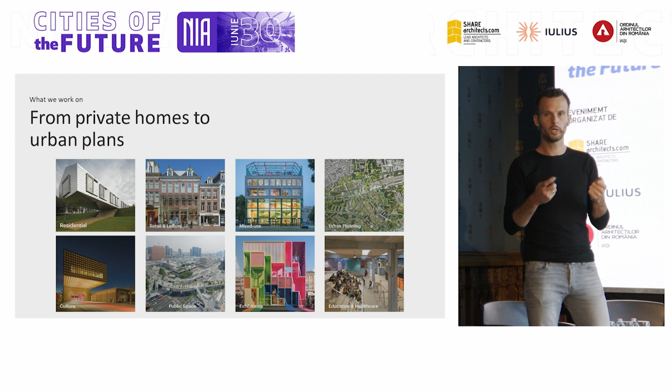What is the Iași of the future? There needs to be a roadmap introduced so that everyone can communicate about it and participate in it, as we are doing here today, to try and find that way forward that we can all agree on.

So these are the type of things we try to do. We design green, innovative, and social places, like this market hall in Tainan, which seems to be a landscape, but underneath are the stalls that sell the foods we will grow on top of the building. These are the kind of density studies we do, trying to mix functions and compactize them in order to make our buildings more energy efficient, make our building processes more efficient, and make better use of the available space in our cities, which is becoming more and more limited.

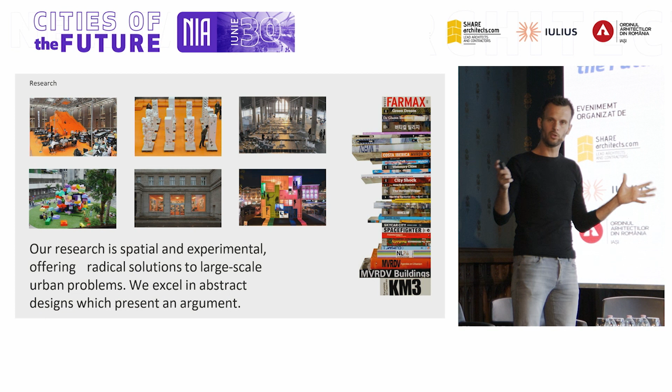And we research to do that. We investigate with universities how we can make human towers that are open and porous, that can sprout plants and allow oxygen in, instead of the basic extrusions popping up in many parts of the world nowadays. We want to see what it would look like if everybody designed their own apartment and we stacked them on top of each other into a tower.

What a great tower that would be. And by being that radical and that almost provocative, we want to try and inspire people to think anew about these things that we have been thinking about for years and for decades, and sometimes we are unable to think differently about and to be a little bit more innovative about.

One example of the buildings that we do here is the Markthal in Rotterdam, where we used apartments to make a fresh market hall in the middle, and we painted a great mural on the inside of that hall with windows of people looking down onto the hall, actually being able to put a little fishing rod down and get a banana from the market stand and hoist it back up again. So this interaction of people and place and activities is one of our essential elements.

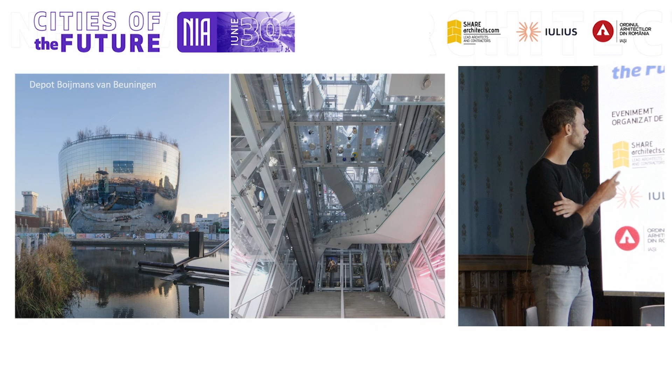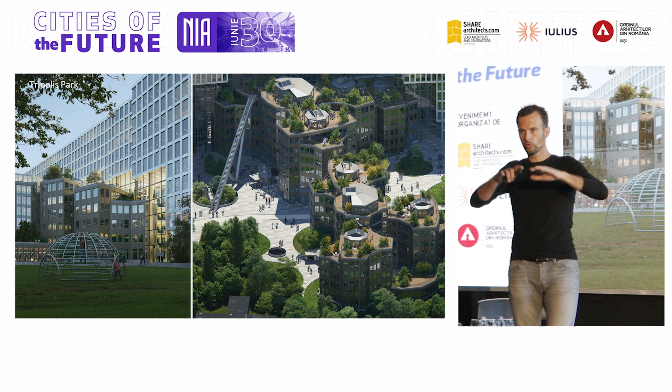So we created a landscraper that is almost hovering over it, taking a very respectable distance from it, creating a tension between the two buildings, where you can see that old and new are actually meeting together. You see at the upper image a place where you can walk through, where you have bridges between the two buildings, connecting the past and the present.

And I'll finalize with the building that is just recently completed, that Gideon and I have worked on for the last 7 years, which is Valley in Amsterdam.

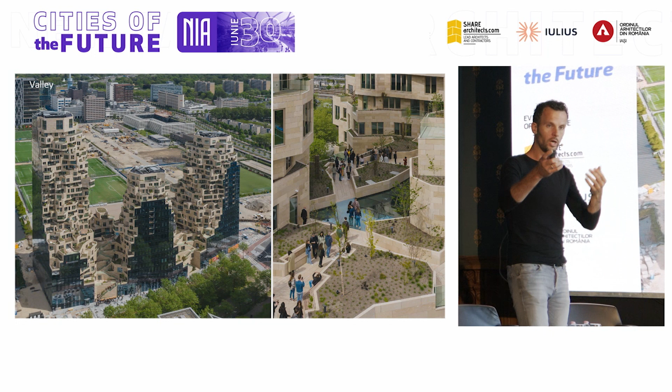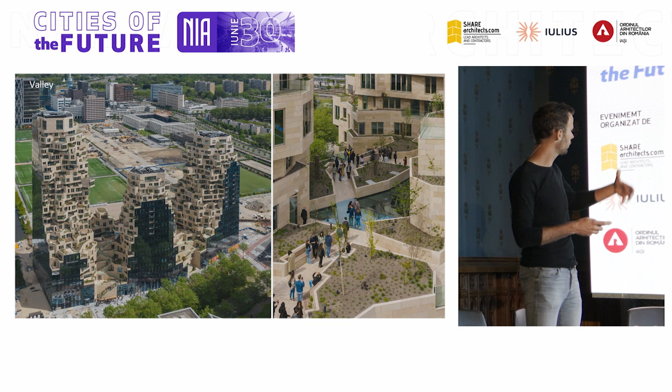And this is more or less our example of how we can make these towers more open and more porous, as we just described, by having this almost mirror-ish block that we have carved out, that we've made accessible. Everybody can just walk up here, take the stairs, and go visit the park that is in the middle of this collection of towers, because it should be open and accessible for everybody. If you make such a building as this, it is for everybody and not just for the people that actually live there. You need to come together in such a space.

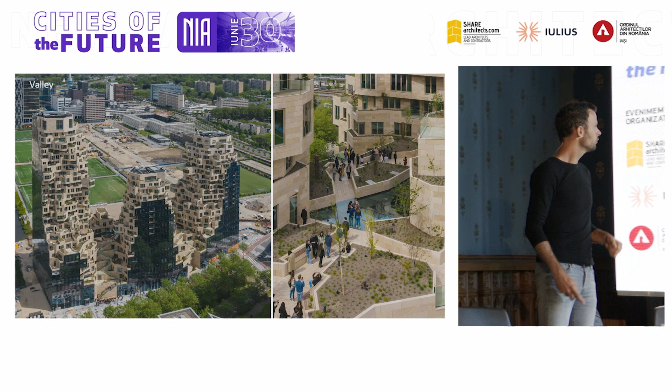Just finally, as we did in Seoul, where we transformed a highway into a horizontal park for everybody to enjoy and to reconnect parts of the city. So that is what we do, that's what we work on, the types of projects that we do.

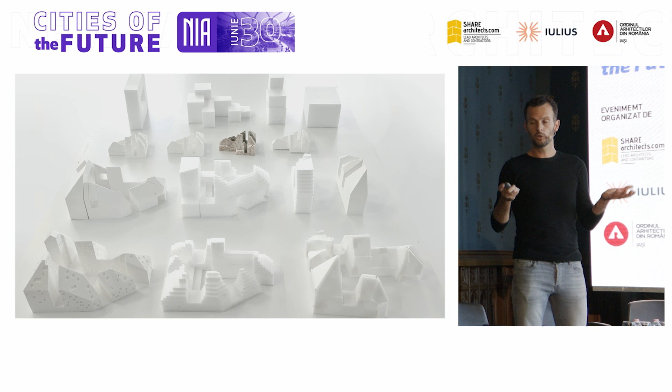So I go to Hills of Iași now, our proposal for the site here, and I'll show you a couple of the studies we have been trying to work on, some of the iterations of the ideas we have. You can see almost instantly that there was a general direction right from the very start that we wanted to investigate and develop further, and that was to find something contemporary on the one hand, but that takes its cues from the surrounding and from the history in the surrounding, because that is actually what the site is all about. There's two sides to it: a higher part, a lower part, an old part, a contemporary part that's necessary. There are dichotomies to solve, right? There's a contrast to be bridged here, and that is, I think, the main challenge for this site.

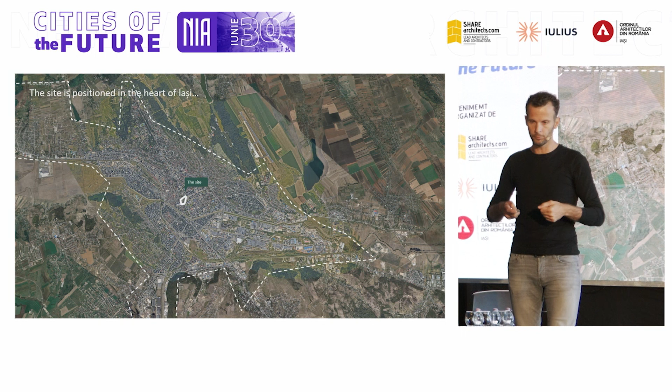So we go to the location, we zoom in on Iași. We have never built a project in Romania before, so it was a great honor for us to be able to put our focus on it, to find the natural beauties of the surroundings here in Iași, and to become aware of the cultural, almost massive cultural kind of load and layering that is happening in Iași, and all the things that have happened here before and how they are still affecting the current development of the city, but specifically also this particular site.

So we look at the site in a little bit more detail, as we have already heard about before, so I'll keep it brief. But yes, of course, indeed, the palace takes central stage here, and it's the part that should be respected and should somehow form the start of this plan. But also the Biserica, where we have been looking at to see how that would fit into it. Also the monastery, with its intricate details on the outside that fascinated us maximally. Great to see what is happening there on the facade and the detail that was bestowed upon it.

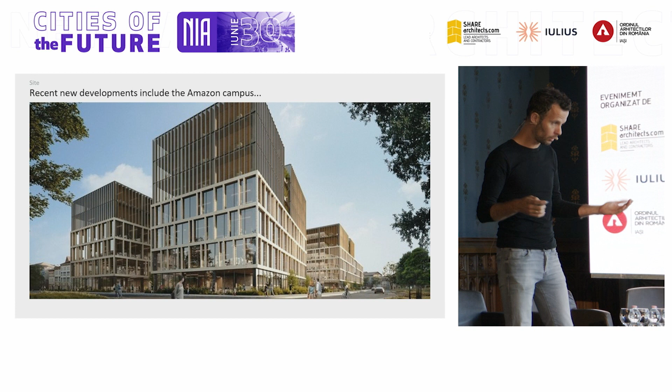But also the Cathedral a little bit further down. We started to feel the weight and the pressure, almost in a positive way, of what has happened here before and what is happening here now. This is also where this duality comes in. New developments are being brought to the center—the Palas Mall is one of them, and the boulevard has been improved recently. So these things are coming together. Iași is ready to take a next step, a new layer to the layers of history already there, and this building could become the representation of that.

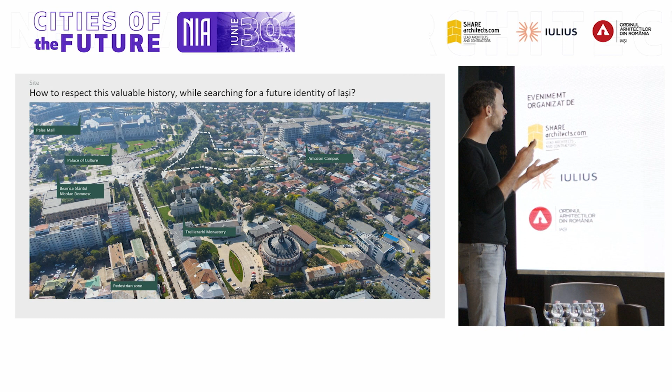And you see here on the side the difficulties: the smaller grain with the Amazon campus on one side, and the palace with its more monumental elements on the other side. So how to deal with that, how to see and form an opinion about all these different, almost conflicting interests.

So we started very briefly on the brief. Lots of housing to be done, smaller apartments as well, which is an important part that would drive the design. A large public area on the ground floor for all to enjoy, and parking partly above ground and partly below, trying to get as much as possible below ground to open up the ground floor.

We extracted these quotes from the brief to see every time if we are actually taking these cues in the way we design it: Are we respectful and honoring the past? Are we making a lively and public place here? Are we leaving a mark for the future without forgetting to give answer to the past?

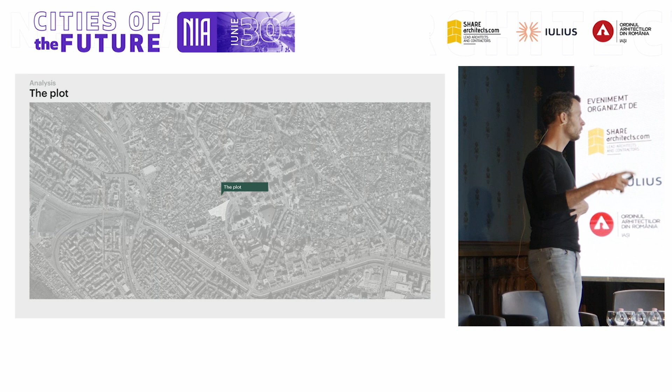These things led to our analysis, first from the site and from the overview, urban point of view. So we have the plot, and we have all these historic players in the vicinity that we need to respond to. Then there are the two axes we need to respond to.

How can the Anastasi axis be given a focal point at the very end? Right now the square is leaking away almost, and something is needed to capture it, but not to end it—because ending it would prevent it from becoming an axis that might continue all the way to the river, where future developments are slated to happen. So it needs to be a building that is recognizable, but porous at the same end.

On the other side, towards the Stefan, it needs to be one of the buildings taking part in this promenade of buildings we have there, with these historical buildings. And what else—the Strada Palat, a barrier you could say, something that needs to be bridged. A problem, I think, that we need to solve to make this a much more accessible area.

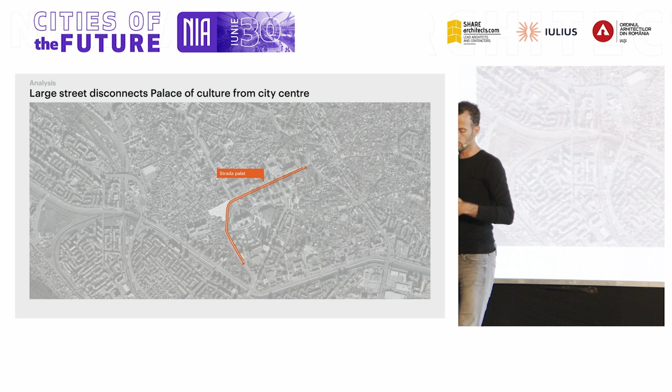How can we reduce this? Possibly by doing one-directional traffic—that could be a start. We can greenify the lane that is opened up, and maybe in further times we can make sure the whole connection to the palace can be made green and pedestrianized, because there is a need for additional green.

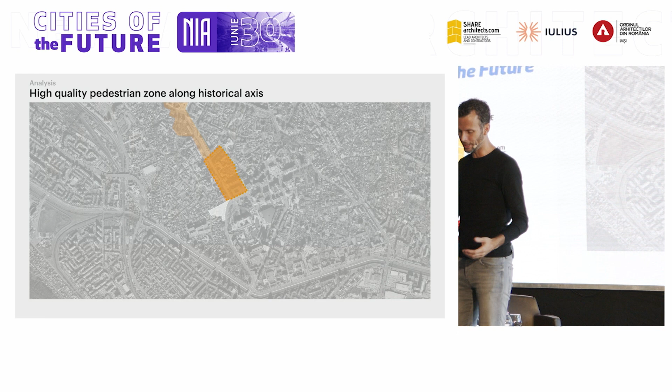There's quite little, actually, in the vicinity that we need to improve upon. Pedestrianizing stops right in front of the palace, and then there's the big car park we see right in front with all the asphalt. There's a big potential there to extend this further. And finally, of course, the height difference—the 12, 13 meters of drop that separates the two neighborhoods—that this building needs to somehow bridge.

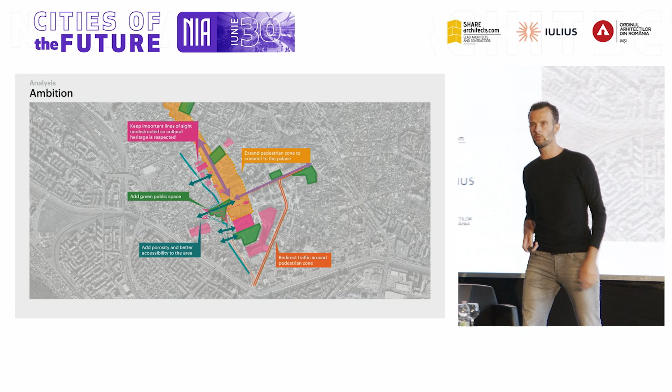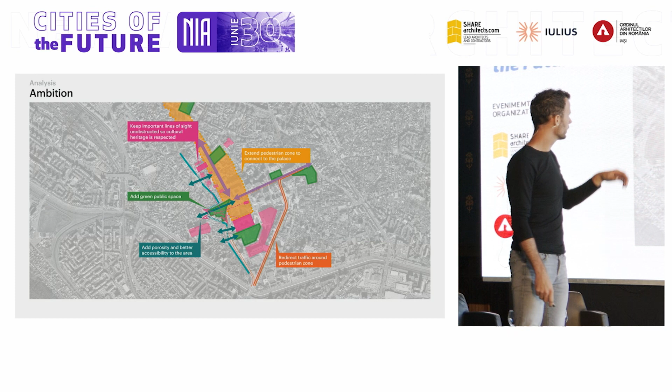We put this all together into this map of analysis, and then we add these elements and ideas to try and solve it. So yes, that porosity to make this an accessible building, a green space, view lines to make sure all the axes pointing towards these historical buildings are integrated into the building, but also readable—so you can recognize where the framing of these buildings takes place by carving away mass of our project. And finally, to extend the pedestrian zone by maybe redirecting the road, as I just explained.

So I boil this down to our ambitions, to a kind of overview, presented in a friendly, happy, and optimistic way. We want to connect, we want to stay respectful to the surroundings, and we want to be exciting at the same time.

Open up the ground floor, open up the doors of the shops and the offices and the gyms and the beer brewers and the people that host lectures for the vicinity and for the community around it.

We want to be future-proof and sustainable, obviously. We have an obligation to the planet and to our future generations for that. And we need to be realistic and buildable. We need to make something that will not just end up as a pretty picture on the wall, but becomes a building for everybody to enjoy. So that's something that we need to take into account.

So I get to our proposal, to our design. The way that we always communicate these proposals is by a step story, almost like a little book that we do, step by step, to show how the data that we have collected becomes an integration into the design and becomes a literal representation of the design as well.

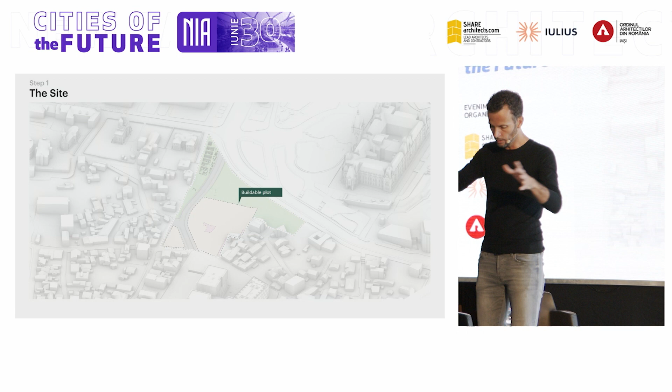So we start with the buildable plot. This is where we were allowed to build, the dotted line. The road was slated to be there. There is a spot in the middle where we're not allowed to build on, very clearly.

And what we did first, actually, is we started to go down. We started to see how far we could go down without going down too far and becoming too expensive, actually, because going down -2, -3 will make the project unfeasible.

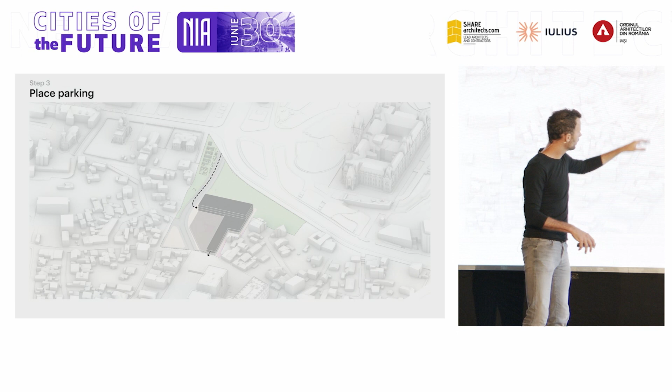And by going down, we were able to put one full layer of parking under -1. And from that point onward, we could stack up with a split-level parking towards the palace side, where the height difference is highest, and we could have the cars come in from the side.

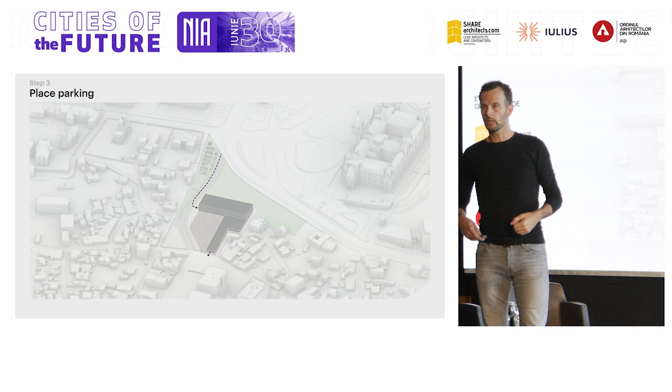And we actually chose to have the cars come out at the bottom, to see if we can prevent future car problems on the side. By having an entrance and an exit there at the same point, you could have a kind of traffic jam forming. So this way of going through it, to us, seemed the most optimal.

And so we continue, we cover it. We take the green that is already there from the boulevard, and we pull it over the plot, and we start to make it green.

And from that point on, we introduced the maximum program. So not a design here, but just a maximum envelope. What could we do? With a very specific mention here of the plot on the side that we wanted to keep empty, that meant a more compact building on the bigger plot. That meant more square meters on that plot.

But it also meant that we could integrate the idea of starting small and ending large, or large and small, whichever way you want to look at it, in such a way that there's something here that is low, that is about the community and about the neighborhood there, and that gives a place for the people that live there that is small, and it's almost like a welcome mat before the building actually commences and starts.

So the next step, we take our roofscapes, we start to carve them out, and we look at the vicinity. We see how the roofs of the palace are shaped, how everything is tapered in this vicinity. Everything that is visible on the skyline has like a fulcrum at the top, a momentum at the very top.

And we wanted to see if we could relate to that in this way, in a contemporary way, but in a way that everybody can read that this wants to be part of that existing cityscape.

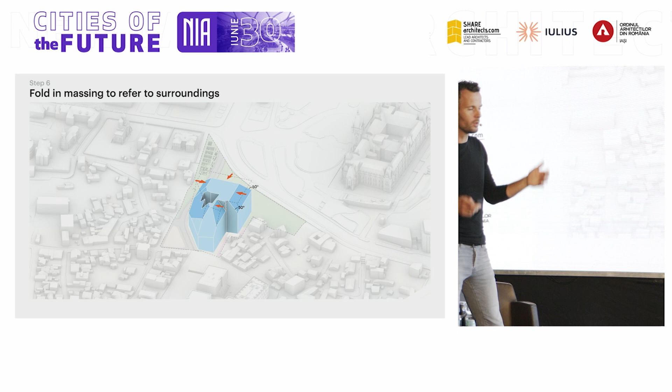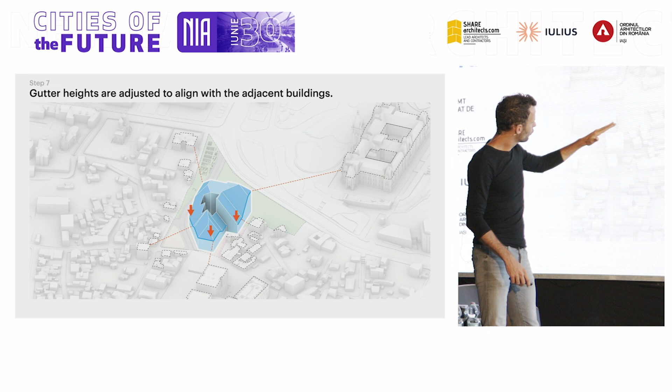And we developed that further. We started to look at the surrounding areas, gutter heights of the campus, where the split between the two blocks is. Can we relate to that? Can we bring the building down on each side to relate to opposing buildings and the heights that they have there, to form this landscape almost of gutter lines?

And then the next step, to carve it out from the inside, to make sure that the width of the building is not too deep. Apartments don't get too dark. We carve away a large chunk in the middle, and we started to make a courtyard in that sense. Still private in this case because it's not opened yet, but that will come, of course.

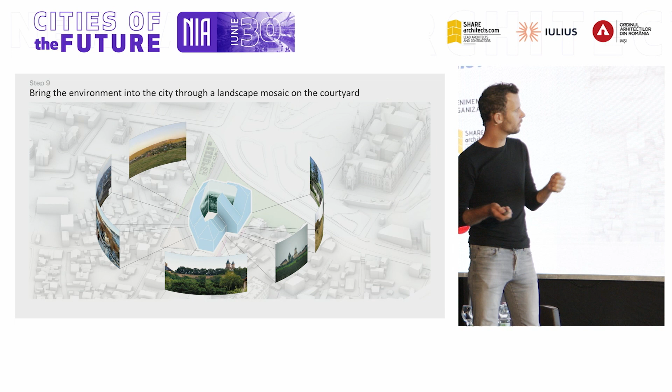And then the next step, we have this great space on the inside, and what can we do there? This is where we thought maybe our newfound knowledge of what is happening surrounding Iași, all these fantastic natural places that we have in the richness that is there, this treasure that is in the surrounding areas, can we bring it into the city? A literal translation of trying to get nature to become more prominent in the city. So we made a panorama.

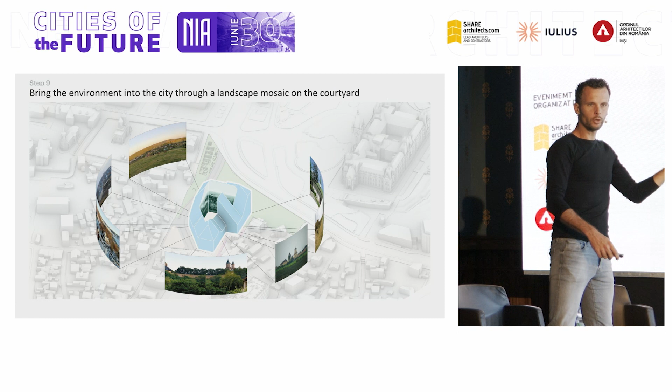We looked around at all the important places of the surroundings and put it on the inside. We painted a 360 painting of what you can experience in different directions if you were to go out to the countryside and see the natural richness of the Iași area. The same applied to the central courtyard floor, but I'll come to that in a moment.

And then we started to open it up. This is the main element of what we do. We open up the block, we make it porous, and we make it a block that can only be here, connected to the city.

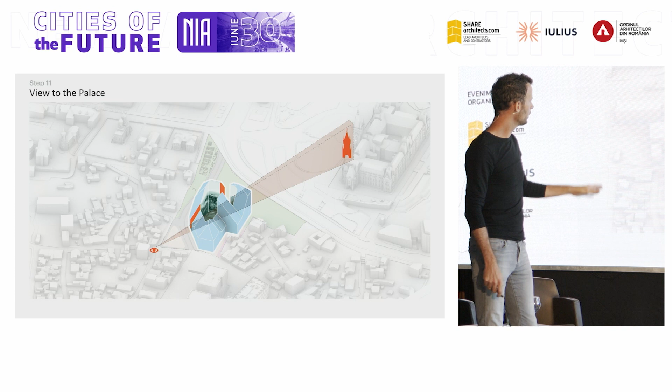So we make this view line to the palace to make sure that it is always framed and visible as a view line. We do a similar exercise towards the Basilica, getting an opening here and continuing the access all the way through, making the idea of being able to pass through it very recognizable and visible.

And finally, towards the cathedral from the ring, an opening as well to frame that view and make sure it stays visible always.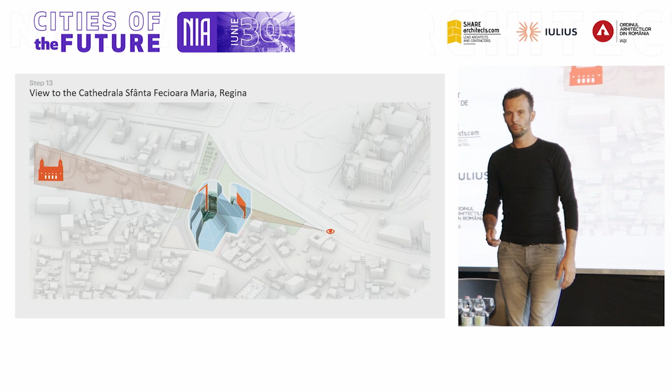Once that is done, we started to implement literal vegetation. Apart from the panorama we have, we wanted to make sure the inside would be like an oasis, a green, cool, cooling place where you can find all types of indigenous vegetation of the area, on the balconies of the people who live there, on the ground of the courtyard, and in the public spaces we make there.

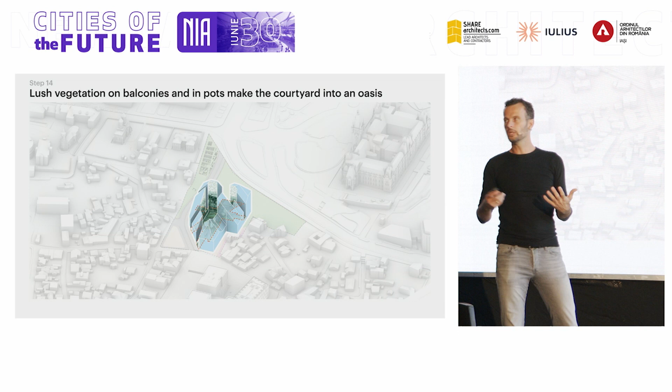So this will be the place where you enter this block and suddenly it opens up to you, becoming almost this palace of the people. This feeling of being surrounded by detail will be similar to what is done here - a richness and layering that this place and building deserves to have.

Finally, accessibility - important to make sure ramps are there, that people can get in, that disabled people are also able to get to all the plateaus and maneuver through this building.

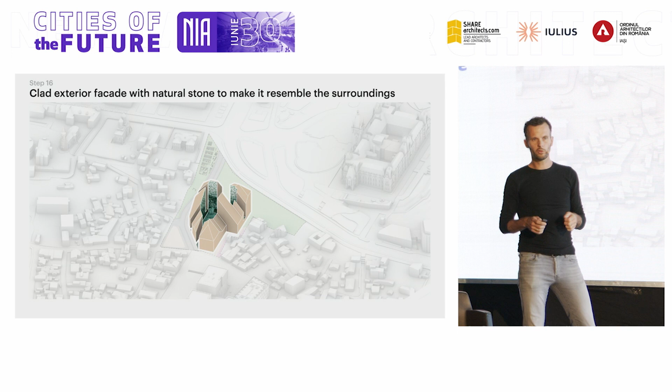Then on the outside, we started to take our cues from the surrounding buildings. We're trying to look at sandstones, natural stones, to see if we can almost mimic the shells of these fantastically decorated buildings we find here, and apply that to our block.

Finally, the parks that we made - I'll come back to this later. We have a great opportunity to make all these collective spaces and thematize them, to make sure they have a distinct activity and a certain reason to go there, whether that's the picnic park, the archaeological walk, or the beer garden you could make in the bottom park.

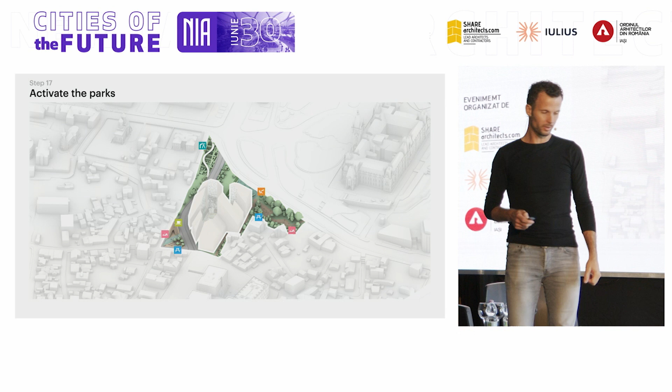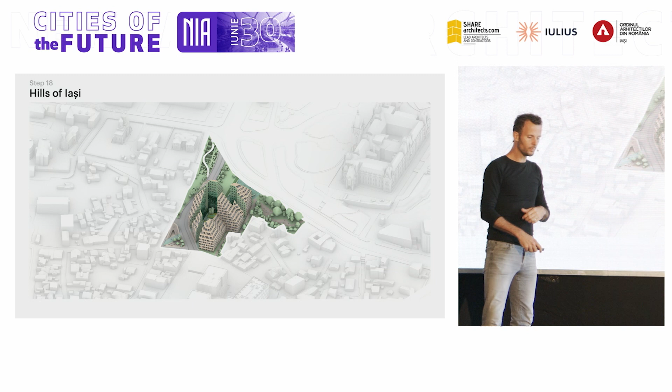And finally, our proposal, by making these grand openings to the houses, but not too grand, aligns sustainability with the amount of glass you should use to not heat up your building too much, by making pockets of loggias where trees can sprout later on. We get this opened up block - this great carved out rock with green on the inside that we want to show you.

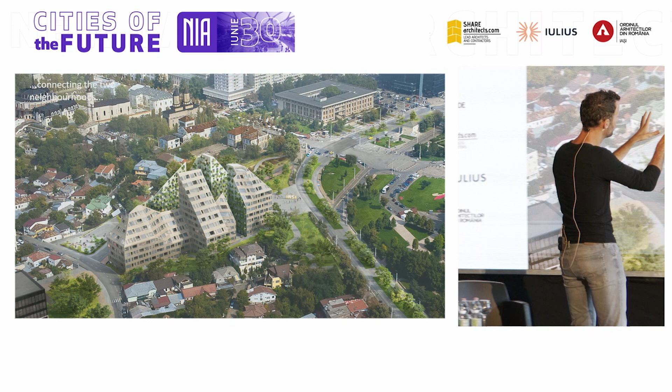So this is what it looks like in the end, implemented into the building and the surroundings, with the plaza here opened up, making a generous gift to the neighborhood, growing up, making a momentum and a move more to the palace side, being the larger volume on that side and allowing this porosity to happen.

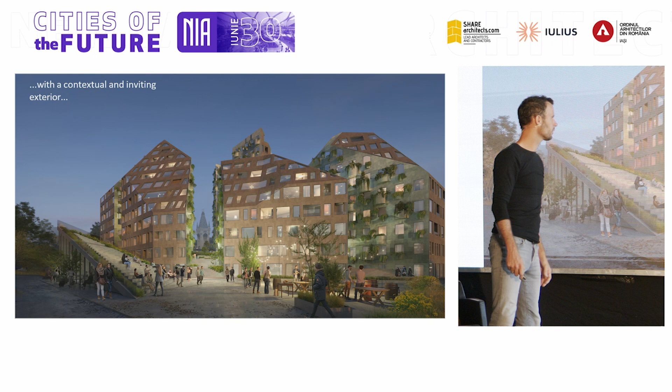And yes, this is how the views then start to present themselves, where you can walk through and see the palace in the background, coming closer and closer, going through this building until you reach the courtyard in the center, where you will see this mural, this great painting, where all the balconies of these people will represent themselves, where people will be able to interact when they stand on those balconies and enjoy this green oasis we make in the middle of this carved out place.

The montages, something we indeed needed to do, to kind of prove how this building would actually embed itself into the urban fabric.

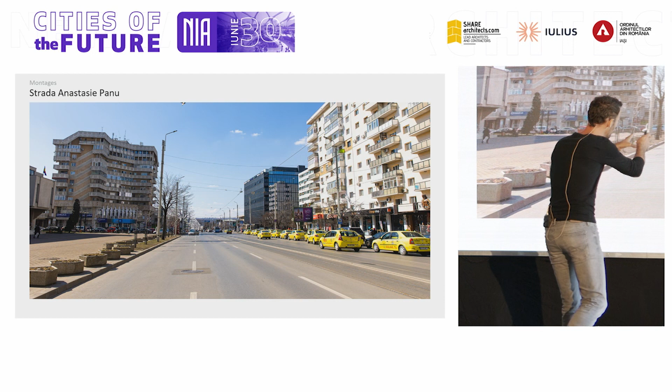When you come closer, you will see that it will actually allow you to pass through and to explore beyond it. Going further, looking from the side of the fantastic boulevard, you will see that it will actually hide itself almost behind it. It will not be visible, as the requirement was.

Same goes for this view from the boulevard, where it will be hidden in between the buildings behind it. And here it will represent itself, of course. Here it will form part of the tableau of this square that we have.

More reduced again here, trying to stay low, trying to not become too visible from this angle, and to be a little bit delicate in that sense, and maybe a little bit more refined, to only have one spire trying to interact with the elements of the cityscape that are already there.

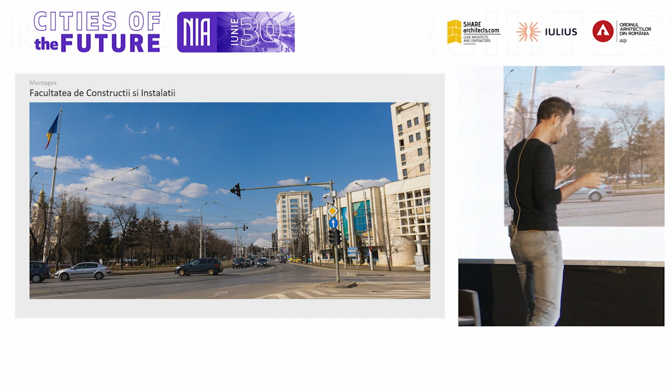And finally here at the end of the road, depicting itself, trying to see if this new form, this new kid on the block you could say, could maybe form an interesting point where you would want to drive towards and explore and investigate. Same here, where the street and the roofscapes are actually mimicked by our building, and we are adding to that roofscape with a silhouette of its own.

Final one from the boulevard, and I move to the public spaces. As I said, a little bit more detail about what we do and what we make. So there are many places that we add to it.

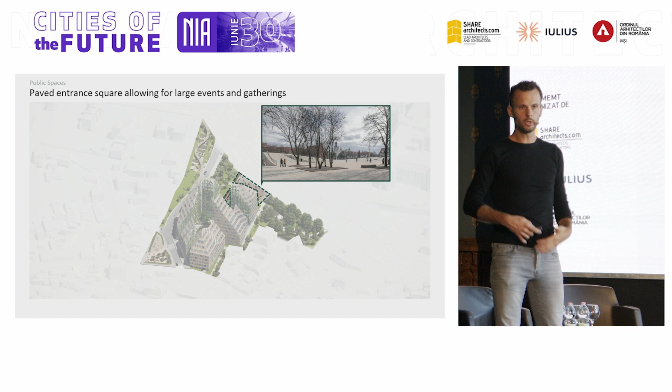We make a kind of drop-off point here, a welcoming square where you would be able to have the car pass by, drop off, drive away, and enter the building from a grand square where you can house activities, fairs maybe, markets maybe.

Then there's our picnic park, where we extend the current very high-quality space with a path and places to sit and to eat together with friends and family.

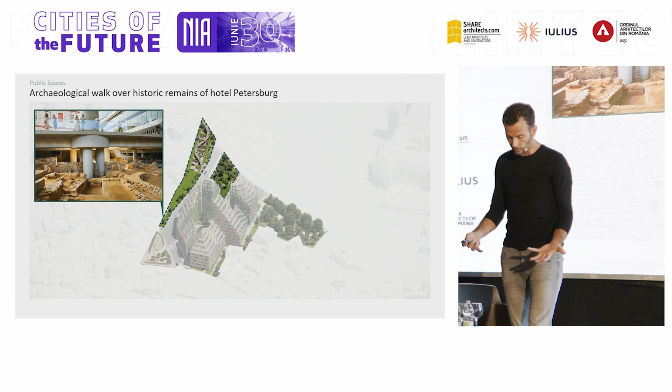Archaeological walk: we insert a road that goes over the findings that we have in this place, make sure that you are aware of them, that you can see them and appreciate them, and start to think about all these other layers of history that have been present on this site.

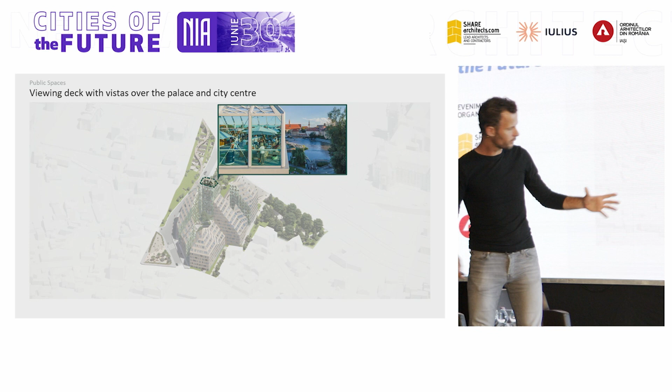We have a sky bar. We have places for penthouses on the peaks of this building, but the highest one we feel should be for the public, should be the place where you could go and have a coffee or an ice cream with your kids and look out over the city together.

We have the commercial spaces, all in the plinth, of course, opening up towards the inner side, where you can throw open the doors, where you can have your coffee and your beers, whatever the moment of the day is, and where we can activate this area on all sides of the building, fully surrounding that.

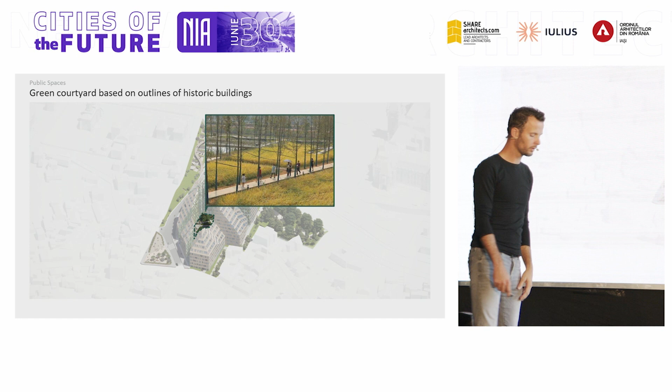And finally, on the inside, we have a courtyard that I will come back to in a moment, a place to stay, a place where you would actually want to linger once you're passing through the building, but decide to spend some time there.

And finally, the plaza, almost indeed a place where you could have that beer garden, where there's a small and kind of integrated pavilion underneath a lifted part of the square, where you can get your drinks, where you can sit upon as a tribune almost, to be able to talk and maybe perform as well.

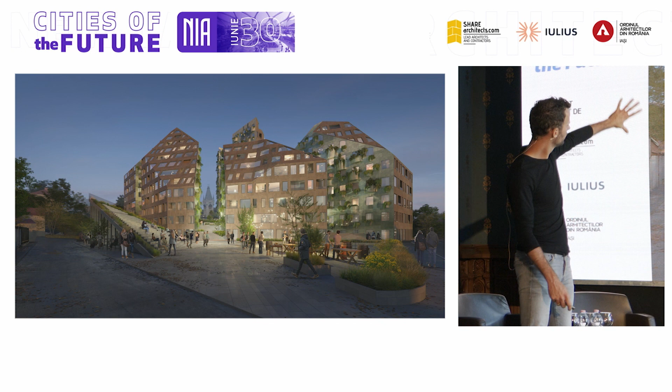And all of this supported by trees, to make sure that there's plenty of shadow, to make sure that there's places where you can sit when the sun is out, as it is in these days. So here you can see that place where you could sit.

So I move to the sustainable part of the design, and we have an obligation, as I said before, to integrate that into our plans. Our main goal with every project that we start is to keep the UN SDGs as a guideline for us, these 17 goals that aim to make a better planet together.

And we do these assessments, and we see where we see possibilities for every project to add to those and how to do that. So I'll give a couple of examples.

Right? So yes, indeed, we can try to give a greener and more biodiverse place. We can stimulate alternative modes of transport. We are very close to the center here already, so bikes will be the main form of transport. No cars — let's try to keep them away as much as possible.

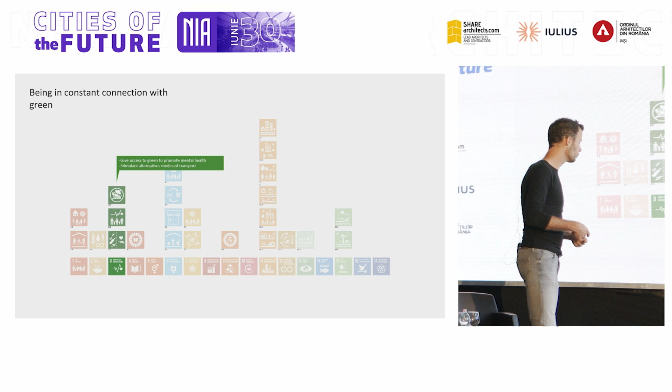Let's try indeed to make sure that we can modify our parking garage and make sure that it becomes something different in the future when these modes of transport move beyond the combustion engine. We can reuse water. We can use our planters to capture it.

We can use the porosity of the ground floor of the courtyard to make sure that this water is retained and reused, stored in a tank underneath the building, pumped up again to irrigate the planters that we would hang on our apartment facades.

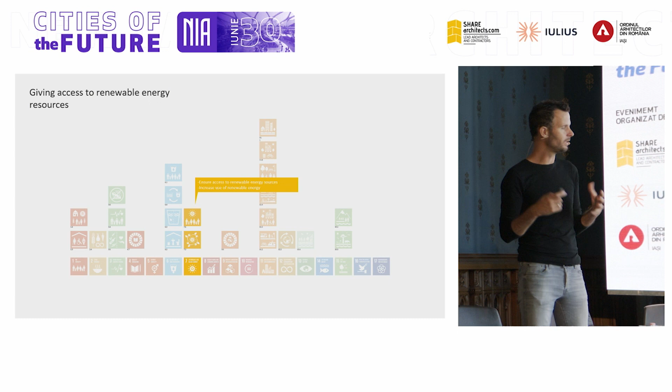We've got to make sure that we lose our addiction almost to energy consumption. We need to be more aware of what we are doing. We need to make sure that our facades are sustaining this, and that we generate energy by adding solar panels, in this case, to our roofscape. I'll come back to that in a moment.

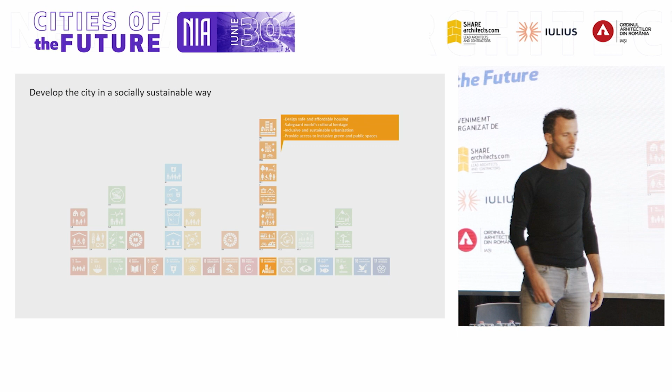And we need to make sure that we make apartments that are affordable for everything and for everybody. A mix is good, small units, medium units, and bigger units together, to make sure there is a certain mix that will allow this building to become much more than just an enclave for the few. Make it sustainable, make it, in an urbanization sense, integrated. Those things we've managed to fixate on.

And finally, the biodiversity of things, to have the plant life be indigenous, to make sure that the biodiversity is added on by these plants that we integrate, to make sure that the city indeed gets infused with nature in a very literal way. We started to analyze the BREEAM side of things.

Just a quick scan to see where we are. We already believe that BREEAM Excellent certificate is very much possible for this building, but we can go beyond if we start to look at materials and look at possibilities to actually also reduce carbon.

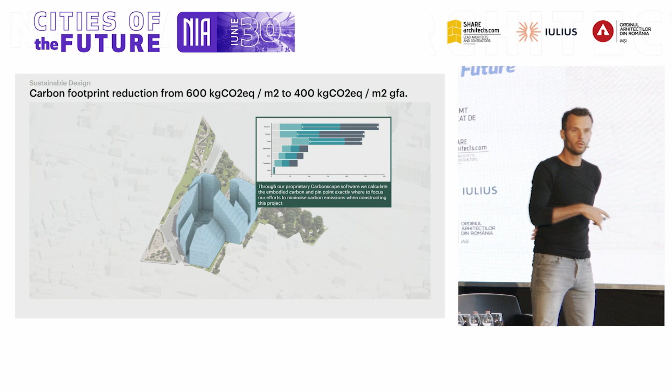So we've written software for this project also to see if we can already start to analyze how much carbon we would actually be using if we would build this project. You see this here in these bars on the different elements, whether that is embodied carbon, whether that's in the structure.

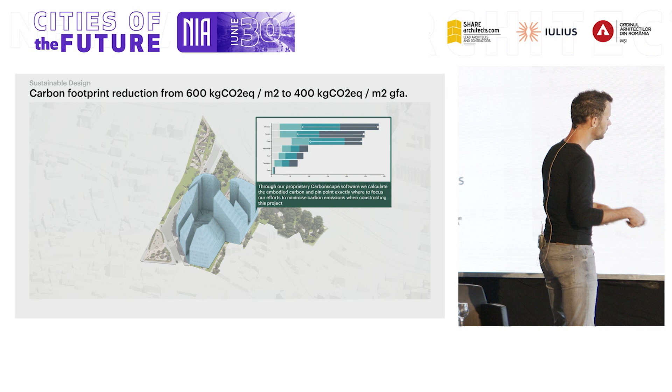And we have a roadmap already, so we can see now where we will be able to reduce the amount of carbon by making design choices, whether that is switching from concrete to wood, or using reused concrete, to make sure that it's concrete that came from a different site and thus reduce our footprint. So this awareness is an important part in the start of our building.

I continue with datascaping in this case. We analyzed the building to see where the sunny sides of the building would be and where the darker sides would be. And we made sure that where the darker sides would be, cores would be placed there, so that buildings would always have two directions to view in.

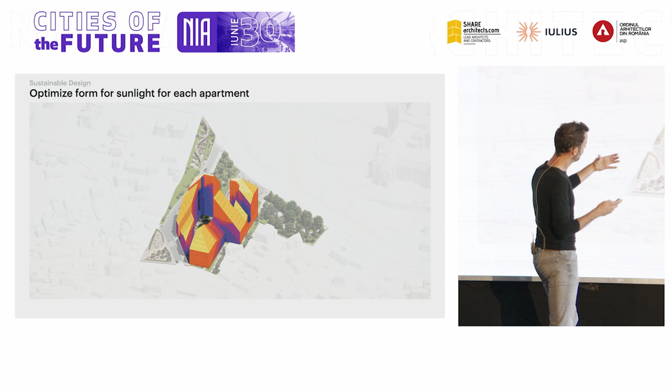And that's why we cut open this building. That's why we needed to have as many corner apartments as it has, so that everybody always is two-directional. Corner apartments are of a higher quality, and by opening up this block, we have allowed this building to have as many as possible.

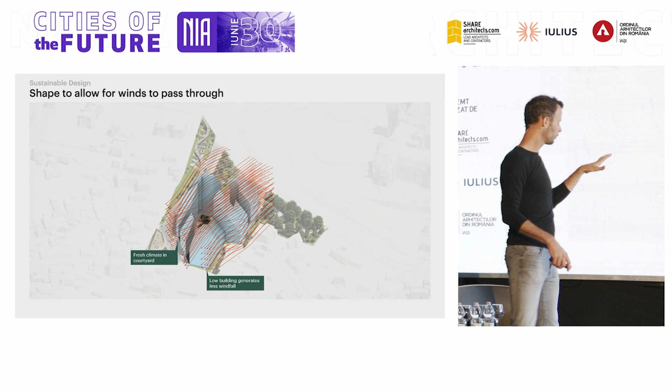The prevailing wind study that we did shows that this porous block will allow the wind to flow through instead of hit up against it, where great fall winds would actually blow you from your bike if you wanted to try and enter your building. So also important to do, especially in winter times when it can be forceful winds, this will help make the building more livable and more human.

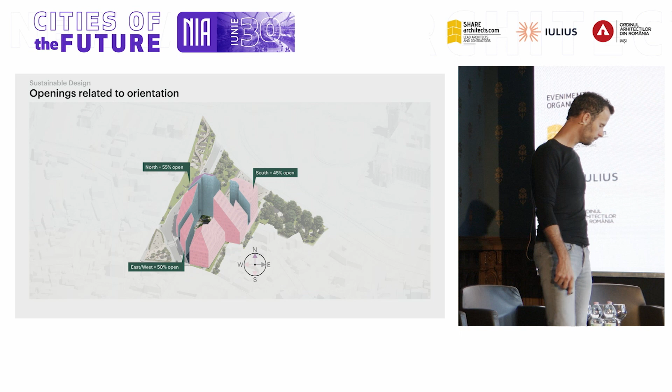We scripted the facade openings larger on the north side to get light to come in, but smaller on the south side to make sure that the sun doesn't come in too much and that no extra cooling is necessary. So this is a building that wants to adapt to its orientation and try to prevent energy use.

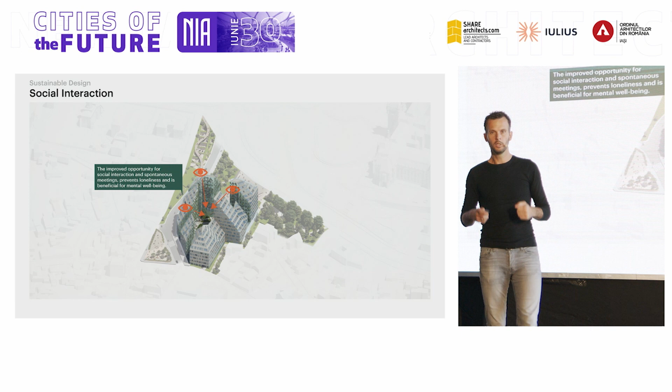And yes, this building will allow a certain social interaction to take place. Everybody will be able to look at this courtyard building and to interact with each other and form a community there. And finally, our attempt to make this a new innovative feature of the building.

We want to try and integrate the PV cells in the roof in a way that we've done before with multiple projects, and that is to print on them and have them be part of the shell of the outside, have them have the same materiality, but still generate energy in that sense. So this roof, by adding PV cells to it, will already allow for 163 apartments to be supplied with renewable energy sources.

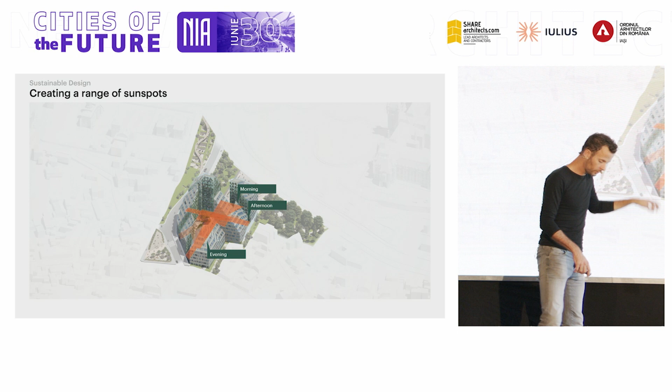And I finalize the analysis with the courtyard, looking at where the sun is actually placed, and we can see that there are multiple places where you could go to. Sometimes the evening has a nice spot where it's warm and sunny, and sometimes the morning, but there will always be a place where the shadow will be and where you can go to if the weather is too hot, as it is now.

The facades, a small introduction to where we got our inspiration from, of the surroundings, as said, of the building we've just done, Valley, to make a natural stone facade that slowly goes into this PV facade when we go to the roofs.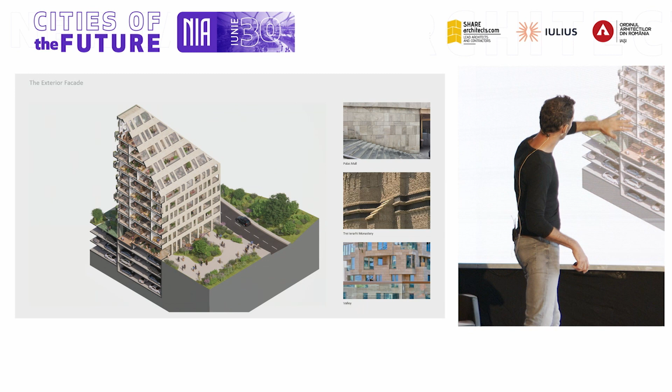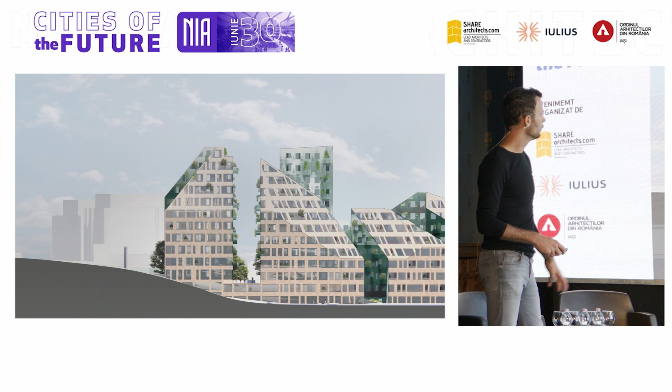It would look like this with these loggias that are now there, where you can have an outside space that might grow to be extended beyond the facade, to have a half inside, half outside place. This is how we want the apartments to have their moments to sit outside. You see this facade drops down here toward the Amazon campus, forming this gradual continuation of the grain difference from the left to the right.

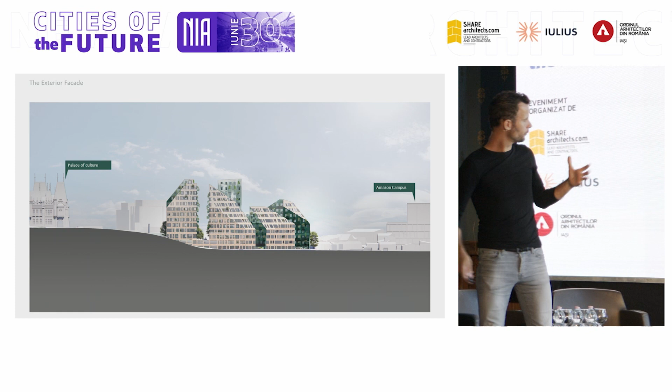Then the courtyard facade, the green facade. We took inspiration, as I said, from the surrounding natural landscapes and wanted to see if we could merge that into a mosaic, add planting and planters to it, and completely decorate this inside facade with the curvy, sinuous balconies that every apartment will get.

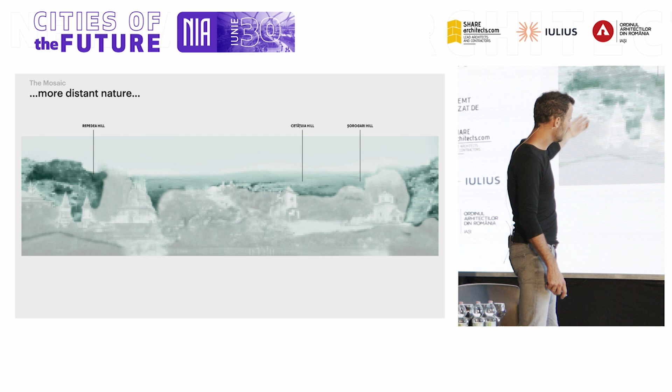I'll briefly say how the mosaic was built up, a brief exercise by us that will need to be supported by an artist later, where we have elements closer in the foreground, natural beauties in the second layer, and finally the hills surrounding Iași and the monasteries on top forming the background, together making up this tableau you can see depicted on the inside of our courtyard.

A final point about the history garden, and then I will wrap up. Again, a datascape on how we made this. We started with the flows of people, the accessibility.

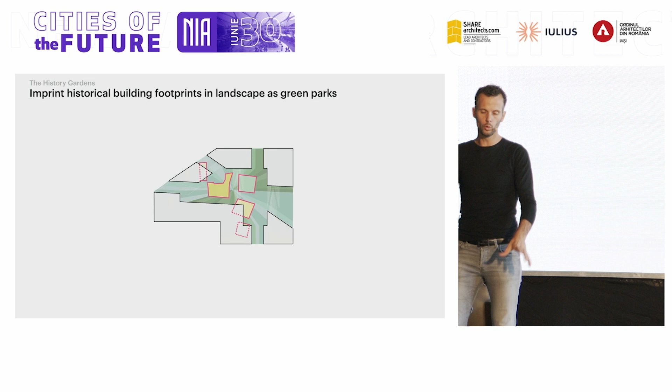We looked at how we could have this panorama continue onto the ground into a focal point. We mapped out old buildings that used to be on the site, the footprints found in the archives, and depicted the plot we are not allowed to build upon. Together with the plantation, this forms the tableau and the courtyard in the middle that you see here graphically represented.

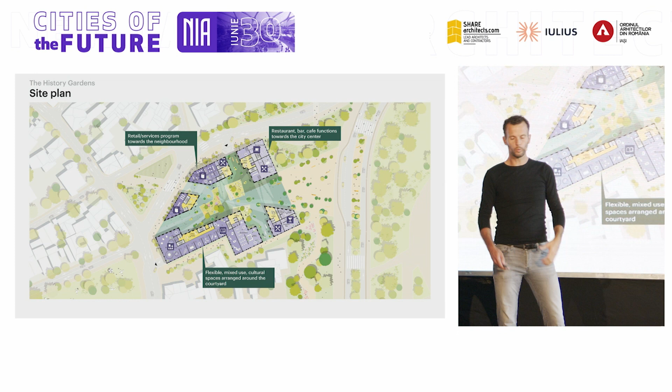Commercial spaces around it, and the lobbies of the apartments in yellows surrounding that, where people will access it by going through the courtyard, meeting other people, and then going up to their apartments.

I end with the residents, a small but important part, I think, when we talk about the build-up. This I already showed you.

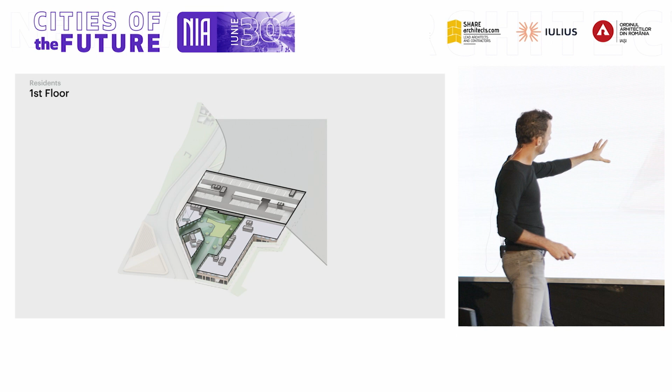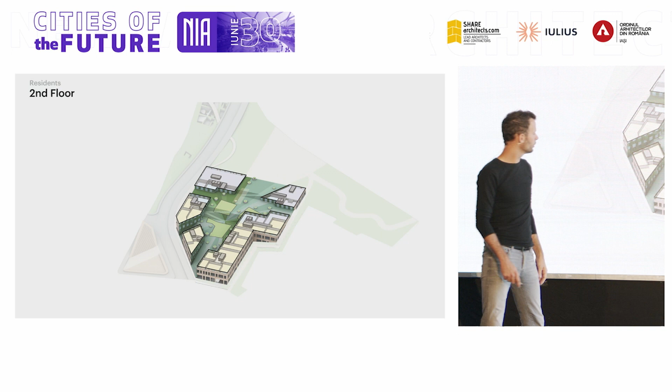We start with the -1 parking level. We go up, and these parking levels continue on this side because of the slope. The commercial activities already come into place. Higher up, at the level of the palace, the first residential unit starts on the lower end, while commercial units remain at the upper end, since those follow the landscape.

We go up and see these corner apartments in the towers, and the views these apartments will have. The penthouse is double height, with the sky bar at the top, and these are the apartment divisions of the different types we had.

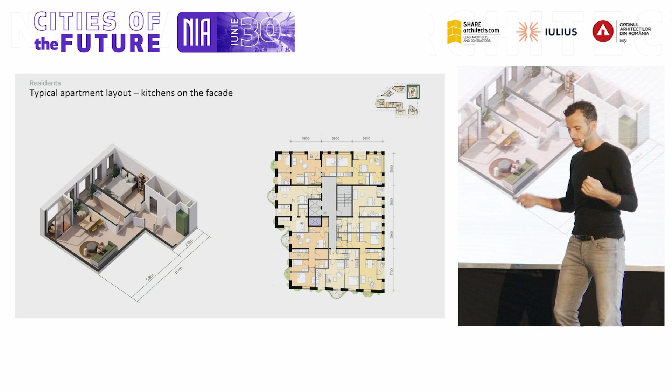The final thing we wanted to show, an important design element for us, is that we wanted the kitchen to have its own window, prominent on the facade. So there's a choice to have a kitchen independent from the rest of your house, or if you want, you can remove the wall, open it up, and make it part of your living room. A choice that offers flexibility for those who will live here in the future.

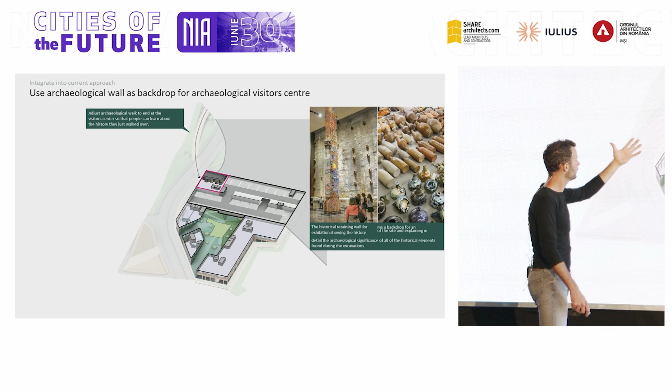We have two options on how to do that: either we integrate it, or we adjust our offset. Simple as that. So we integrated it here, creating a fantastic space where this retaining wall would be visible, where you could have a wine maybe afterwards, as part of a museum connected to the commercial spaces above.

Or the second option, where this corner of the building would need to be modified slowly and slightly to make that retaining wall visible. Our silhouette changes slightly because of it, but it can absorb it. I think that's the power of this concept, that it's able to do so.

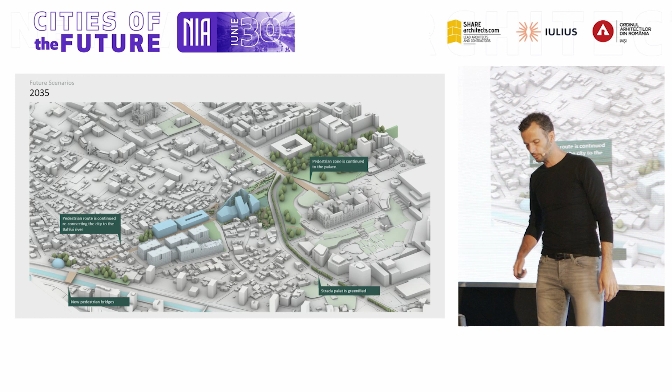We have future scenarios planned, as discussed before. Can we see this as a catalyst for the area? Can we start to greenify the palace in front and have a more pedestrian area? Can we start to have an access that goes towards the water? And what could happen next? I don't know. What is the city of the future? How would Iași develop? I don't know. But we need to think about it and start to form a vision so that we can act towards it.

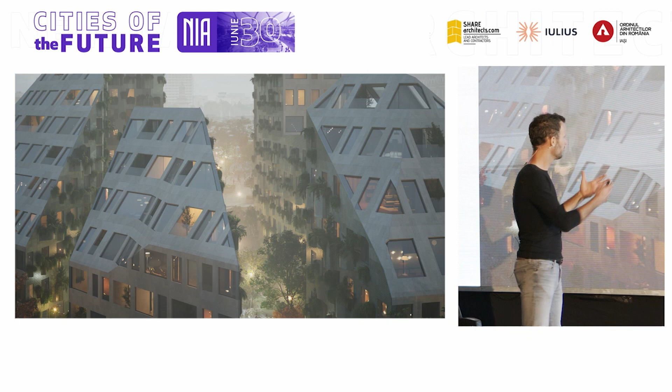I finalize with these images of how the building is now perceived and how this space that is going to be for the people, this palace for the people, this almost green cathedral that we make, would become part of the fabric of Iași. Thank you very much.

Thank you so much for the presentation, a little speedy. Well, the whole thing certainly makes you want to climb it, explore it, and maybe go beyond.

We've seen this step-by-step design process that you just described. The future will tie us more to computational instruments, whether they're parametric or machine learning algorithms. You already developed MVRDV Next, where you're perfecting this automated design process, whether it's about trial and error, generating forms or structures, or simply experimenting. I think there's nuances in everybody's practice, so in regards to this, how do you go about the creative process?